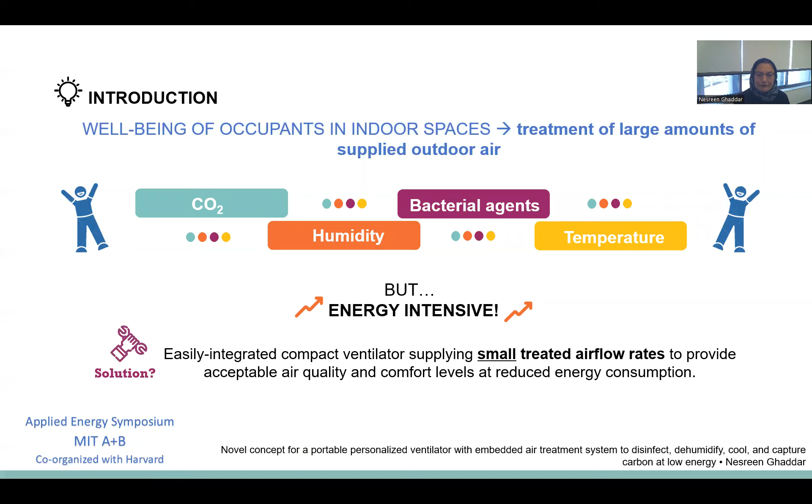What we are proposing as a solution to reduce the energy burden is basically to design an easily integrated compact ventilator supplying small treated air flow rates to provide acceptable air quality and comfort levels at reduced energy cost.

So we focus on the occupant-centered ventilation strategies like coaxial personalized ventilation, which consists of one primary jet that is cooled and is clean, and another secondary jet consisting of disinfected room air. Such systems provide the user with enhanced comfort and air quality levels while operating at low flow rates. For example, the primary jet would be about 2.5 liters per second, and the secondary jet would be at 8 liters per second.

By minimizing shear stress at the boundaries of the primary clean jet, this configuration becomes effective in protecting the occupant and effective in clean air delivery to the breathing zone of the user at minimum flow rate of the treated air. For ease of retrofitting and practicality, personalized ventilators are designed to be ductless systems that extract the cool room air and supply it to the microenvironment of occupants. However, these systems lack the potential to treat the personalized ventilator supply air.

So there are new techniques evolving in the research that rely on using desiccant material, such as metal organic frameworks, MOFs, for dehumidification, for decarbonization, and even for disinfection of air. When implemented in personalized ventilation systems operating at low flow rate, these desiccant systems are expected to be compact in size because I only need to dehumidify or decarbonize a very small amount of air. So the combination of MOF-based desiccant techniques within ductless PV system results in clean, dehumidified, decarbonized supply air to the PV user.

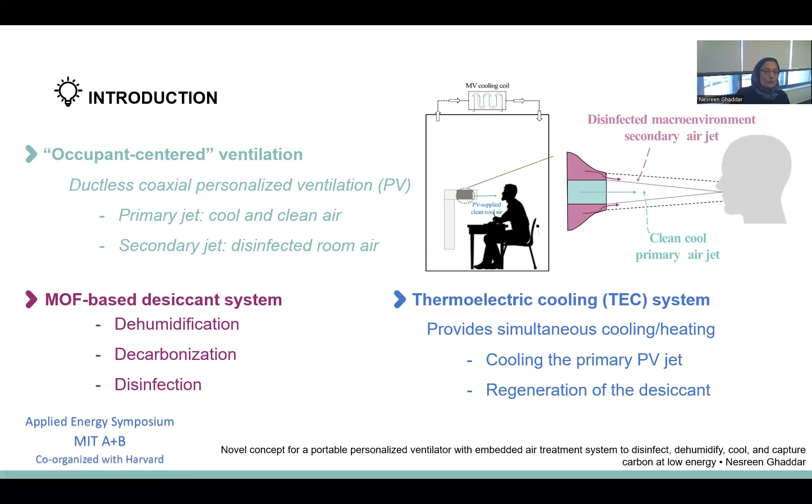So the novelty of this work resides in the multi-feature of the proposed system that decontaminates, dehumidifies, decarbonizes, and cools the air to be supplied locally via a ductless coaxial PV system, providing enhanced air quality and thermal comfort levels at reduced system size and energy cost. Implementing these air treatment techniques with ductless PV using low airflow rate is a win-win strategy, where the air treatment system allows the supply of cool, decontaminated air at low CO2 and H2O concentrations at reduced system size.

An integrated mathematical model of the system processes and components is developed and validated via experimentally published data. Then the model is used to adequately size the system and simulate its performance for typical relaxed room air conditions. By relaxed room air conditions I mean the background air doesn't have to be at low temperature. It could be as high as 26 or 28 degrees centigrade when combined with the mixing system. The CO2 concentration doesn't have to be at 1000 ppm. It could be relaxed to 2000, while still delivering the needs of the occupant directly in the microenvironment where it's needed.

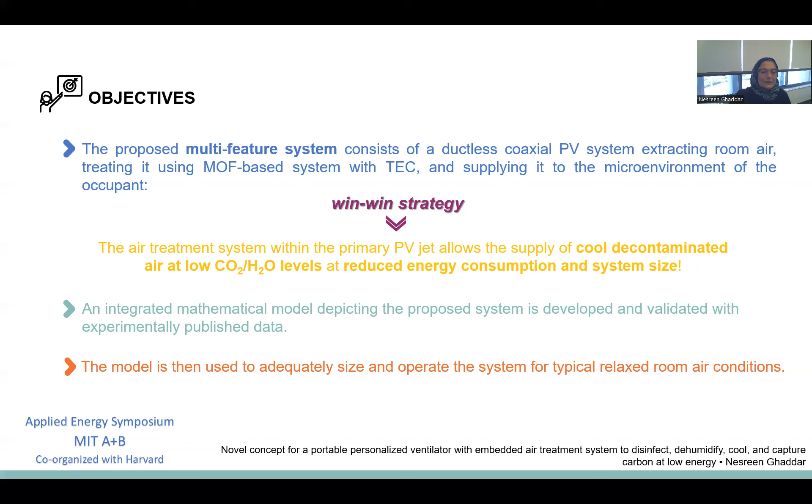So to describe this system, this personalized ventilation system consists of a stationary coaxial PV system that extracts the room air, disinfects it from bacterial agents, treats it for water vapor and CO2 removal using MOFs, while simultaneously cooling using a thermoelectric cooling unit and supplying it to the occupant breathing zone as shown in the figure.

Two important advantages of using thermoelectric cooling in this application: it provides simultaneously the cooling on one side and the heating on the other side that is required for the regeneration airstream, so it can help in providing the regeneration energy required for MOFs. Furthermore, it can easily switch the cooling and heating mode simply by alternating the supplied current between these two streams.

So highly stable MOFs structures were used as platform for post-metallization and silvification employed as antimicrobial agents. They are used for the disinfection of both PV primary and secondary air flow jet. And you can see that the antimicrobial MOFs is actually done through a loaded filter at the inlet of the ductless PV that draws the macroenvironment air into the compact system.

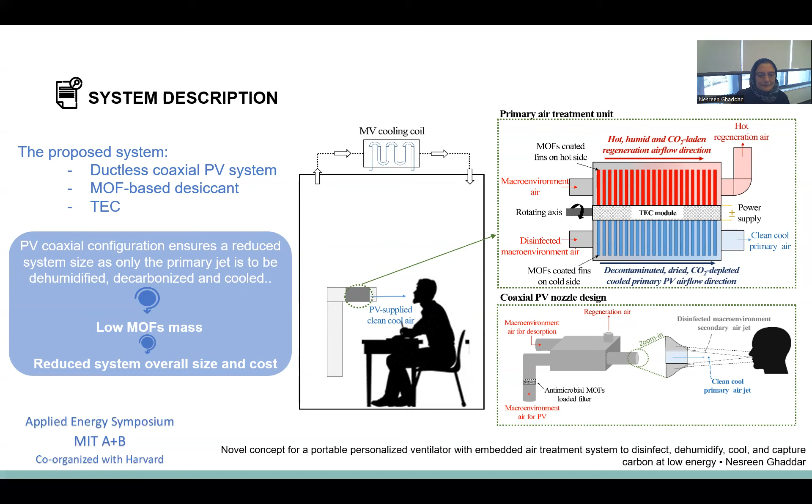All right, we go to the methodology where we have an adsorption model. All these numerical models are based actually on heat and mass balances of the adsorption process using MOFs and the Peltier effect of the TEC unit. These models are used to size the air treatment unit and determine its energy consumption to provide the supply air.

So for the adsorption model, we have a lumped transient adsorption model that is adopted in this study. The reason we say it's transient is because of the flipping that takes place in that cycle. And we have the mass conservation done for each species, whether it is CO2 or H2O. We are assuming that around each side of the unit, I have uniform conditions and I can do lumping here.

I have also the energy balance on the air side, which is a typical balance. All I need to feed in is the heat transfer coefficients depending on the airflow rate. The surface temperature, however, is the part here, TS, that has the transient effect because of the frequency of flipping the device between one stream and the other.

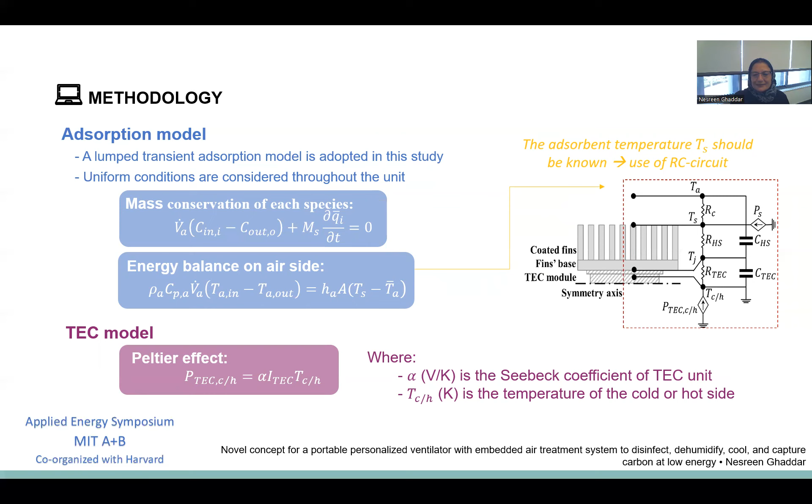The TEC model, also following well-known models in literature, has been followed to be able to find out what would be the temperature of the cold side of the plate. Of course, to solve all of these equations, the adsorbent temperature TS should be known. So the RC circuit that is equivalent for the system is used as shown in the figure on the right-hand side, and then we solve for that equation with the given inputs and outputs.

Now, we have the fully integrated model, where each component or process is validated for inputs and outputs with literature data. We need to have an approach to size that system, because I would like to find out what is the mass of MOFs that I will need for the effective capture of water vapor and CO2. And whichever mass is higher, I will take the higher mass to be able to do the process.

So we know that the capture amount of each adsorbate depends on the personalized ventilator flow rate to be treated, the specific humidity and CO2 level of the air at intake, and also the expected exit conditions of the PV unit, the regeneration temperature for the MOF, and the cycle time. That is the period you will use for flipping the device from hot to cold and cold to hot.

So points 1 and 2, about the flow rate and supply air conditions, temperature, H2O and CO2 concentrations, must provide the needed air quality and thermal comfort to the user. So I have a specific range to work with. I know that the user must have probably a relative humidity of 50%, CO2 concentration not more than 400 or 500, depending on what you decide on the specs.

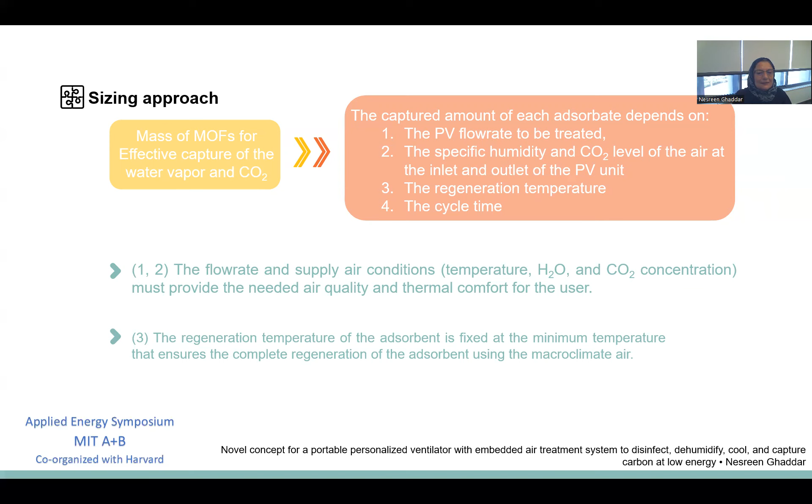The regeneration temperature in point 3 for the adsorbent needs to be fixed at the minimum temperature that ensures that I have complete regeneration of the adsorbent using the macroclimate air. The macroclimate is the room air that is withdrawn at the intake of the ductless PV.

And then point 4 about the cycle time, that is the flipping frequency at the TEC. It depends how frequently I flip that TEC unit. It would be probably of order of minutes or more. We will see from the case study that we will apply this system to. This is usually fixed to simplify the control and operation of the proposed system.

So if we use generally a short cycle time, the adsorbent mass will decrease because frequently I am flipping and heating, removing the heat immediately from this. But if I'm using short cycle time, that means I will have fluctuations in the supply air temperature because the hot side, the hot vent side of the coated MOF would be warm, and when you intake the room air at 26, for a short period of time it's going to be warmer than usual, and it might not be able to deliver immediately to the occupant the desired output temperature of the PV stream, which is typically at 22 degrees centigrade.

So these are the advantage and disadvantage if I use a short cycle time, which means that I have an optimal time that can reduce the adsorbent mass while ensuring that thermal comfort of the user is met. And I'm going to use genetic algorithm because I have discrete points that I can calculate the objective function for, which is the coated adsorbent mass. Remember, these MOFs usually have high volume. So if you need lower mass, then your design works better for the system to be compact.

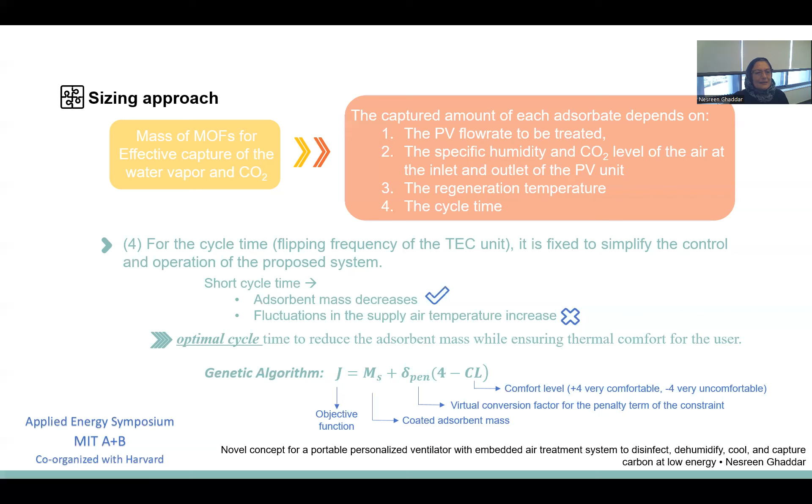So I put the system specs, typical relaxed macro environment conditions. I'll choose the temperature of 26 degrees centigrade, relative humidity I allow in the room to be 65%. CO2, I raise it to 1500 ppm, and then a concentration of 10 to the power 5 colony forming units, or CFU per meter cubic, of airborne bacteria. I set that limit. So for the MOF, I'm going to use MOF Nb-OFFIVE-1-Ni. This is commercially available. It has exceptional carbon and water capture capacities with a regeneration temperature of 75 degrees centigrade.

The personalized ventilator supplied air, 23 degrees centigrade, with the flow rates that I mentioned before of primary jet at 2.5 liter per second and the secondary jet of 8 liter per second. In total, you have all that cool air coming to the front of the occupant, and that will provide the comfort. Relative humidity, 55%, and a maximum concentration of CO2 of 400 ppm, which is ambient level. And of course, the supplied air is exempted from bacteria agents because I've already put the filter at the intake to the PV.

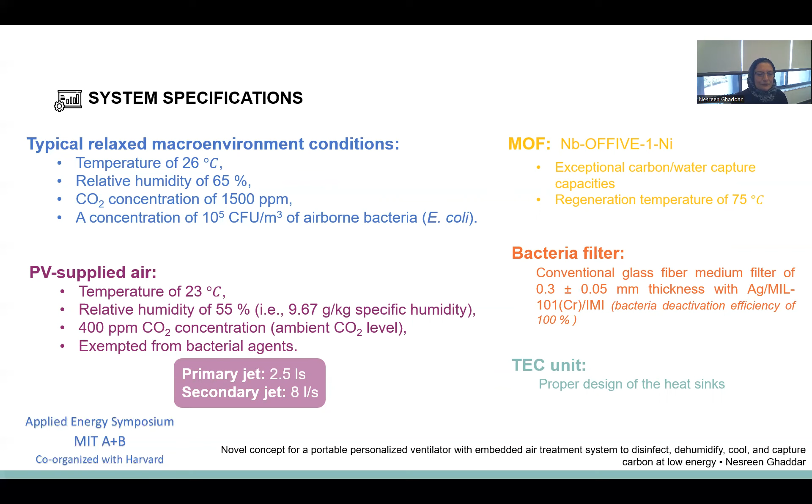The switching time, 10 minutes, tended to provide a comfort level of 0.9 using the modeling that we have. We have used the integrated model. We simulated with the optimization algorithm to determine the optimal switching time that is able to provide the adequate level of local comfort at minimal system size. Switching time of 10 minutes ensured the highest comfort level close to 0.9, which is comfortable. With the switching time of 10 minutes, the needed mass of the adsorbent was 60 grams to remove the needed amounts of CO2 and H2O and meet supply air conditions in the species concentrations. Note that this mass was mainly dictated by the water vapor capture requirements.

The adsorbent regeneration temperature was provided by the TEC module, along with the needed cooling power for the primary PV airflow. For this current application, 2 TEC units with cooling power of 30 watt each were used, which also provide a temperature difference of 55 degrees centigrade between the two sides of the TEC. For effective heat dissipation at the hot side of the TEC units, they were equipped with a heat dissipation sink formed of 19 extruded fins with the following dimensions: 110 millimeter by 50 millimeter by 1 millimeter thickness and 3 millimeter spacing. And the needed 60 grams of mass were coated with a thickness of 0.15 millimeter. So this is the design that I have. And as I said, the comfort level was best with 10-minute period for the flipping.

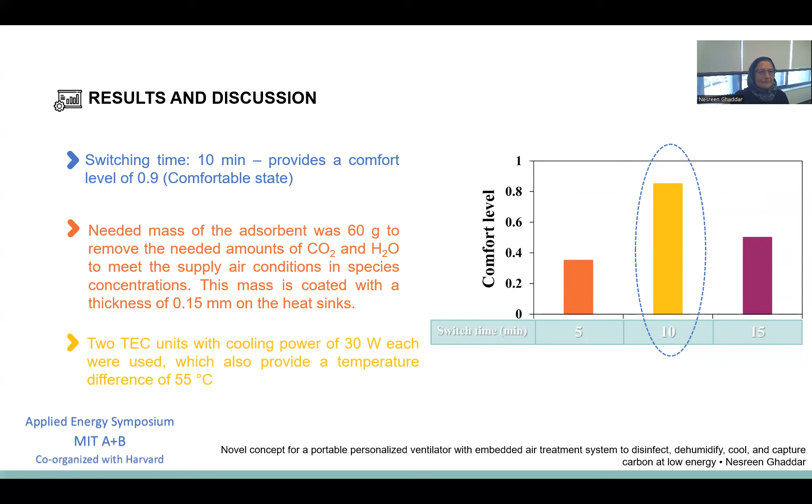When I try to observe how that system operates, remember I have a transient period here. I cannot guarantee that the supply air is going to be at 23 all the time, all right? There is a certain period at the beginning of 2 or 3 minutes in which the supply air of the PV is going to be slightly higher than 23 degrees centigrade. But this is why if we look at temperature

of the PV jet outlet and the regeneration jet outlet, plotted here as a function of time over a period of 60 minutes, you notice that the temperature at the beginning of the cycle was about 27.2 degrees centigrade. That's an effect from the previous cycle. So this only lasted for 2 minutes, and still it offers the desired comfort for the occupant. And this is the transient comfort. So people can tolerate slightly higher than 23 for a very short period of time, given, of course, that you have a flow rate of 10 liters per second of jet flow towards the face and upper body.

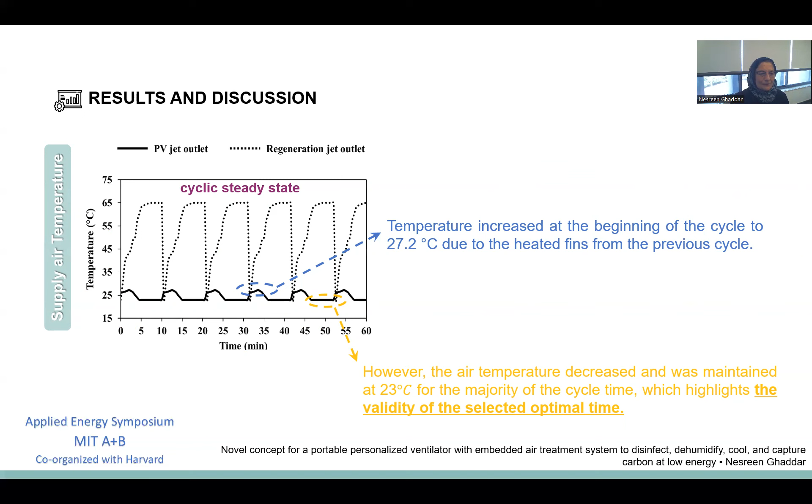So this is the cyclic periodic solution of the temperature of the PV jet and the exit temperature for the regeneration jet. In addition, we are plotting the specific humidity for the PV outlet and the regeneration jet outlet. And we're plotting also the CO2 concentration as a function of time, also the steady periodic solution for the flow conditions exiting the supplied jet to the user and the regeneration jet outlet.

We noticed the following. Both water vapor and CO2 witnessed a high concentration at the beginning of each cycle caused by the high temperature of the adsorbent, which reduces the capture capacity for a short period of time. However, as the adsorbent was cooled by the TEC, its capacity was restored and the target supply concentration was maintained throughout most of the cycle time, which is about 8.5 minutes. Only for 1.5 minutes you are violating this, but in total, it was mainly satisfying your requirements of 55% relative humidity and CO2 concentration below 400.

Actually, because we designed the system for water vapor to be adsorbed at this level and used the mass for this, we ended up with CO2 adsorption even below the ambient conditions. So we ended up with a CO2 level around 250 ppm. Remember, the ASHRAE requirement is 1000 ppm in indoor spaces. This is due to adopting the greater mass needed for water vapor adsorption.

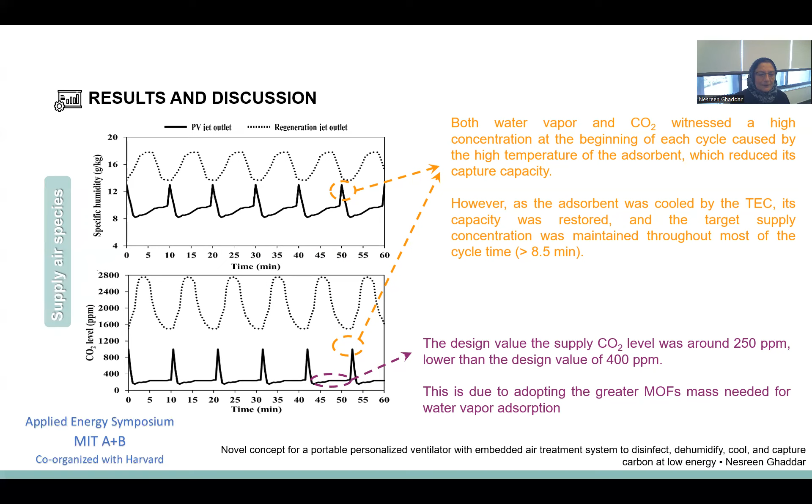In conclusion, we've just proved the concept that it would work. We have not yet built the device; the work on the prototype is dependent on funding, but it is something we are going to pursue. In conclusion, a personalized stationary air treatment unit consisting of a coaxial PV system integrated with an antibacterial filter and a MOF-coated TEC unit has been developed. Experimentally validated mathematical models were adopted to minimize the system size while maintaining thermally comfortable conditions.

The models were also used to simulate the system operation and determine its energy consumption, and it was found that the system required a total of 60 grams of adsorbent, while it needs 130 watts of electrical energy to properly operate, because I need to operate both the fans that drive the flow and the thermoelectric cooling unit so that I can regenerate and provide the cooling.

For example, if you have an occupant in an office space of 15 square meters, normally what you need to remove as load, because you will have to cool the whole air, dehumidify and so on, would be typically 15 multiplied by 70 or 100 watts per square meter. So what we are doing here, we're cutting this to 1/10 of its value because I'm only focusing on the needs of the occupant. Future work is necessary to assess the impact of implementing this system on the energy consumption of the background room air conditioning system.